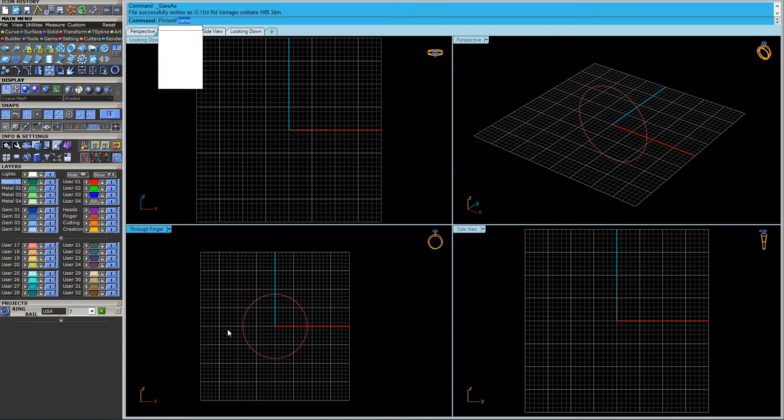Alright, let's start. So we're going to do this in a size 7, and I'm going to place the background image. I already have this in my desktop, and I'm going to align it with my finger rail here to make sure I get it proportionally right. And I'm just going to trim this image. Alright, so we could start.

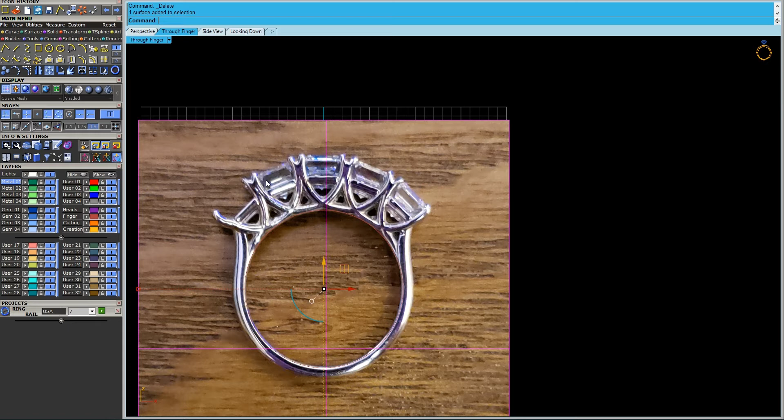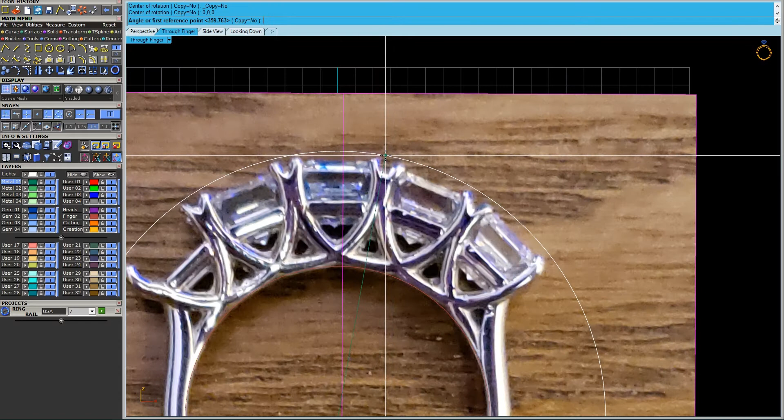What I'm pretty much going to do is remove 1 stone from this setting, and I'm only going to do a 4-stone. So from this same image we can use and just rotate it here. So imagine there's only 4 stones here. Once we do that, I'm going to actually put in the measurements for my stone, and I'm looking for the emerald builder.

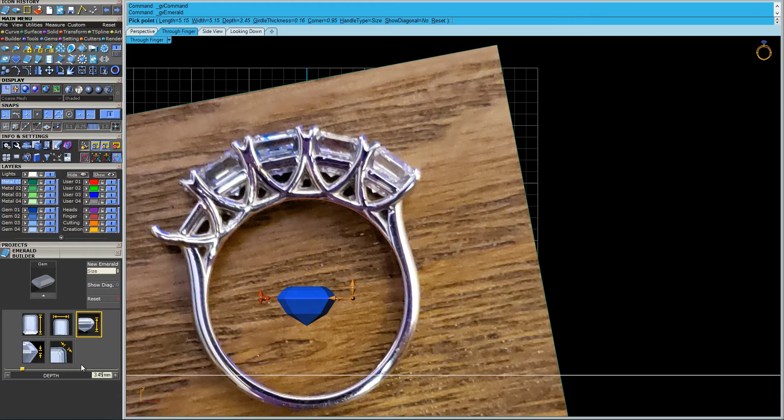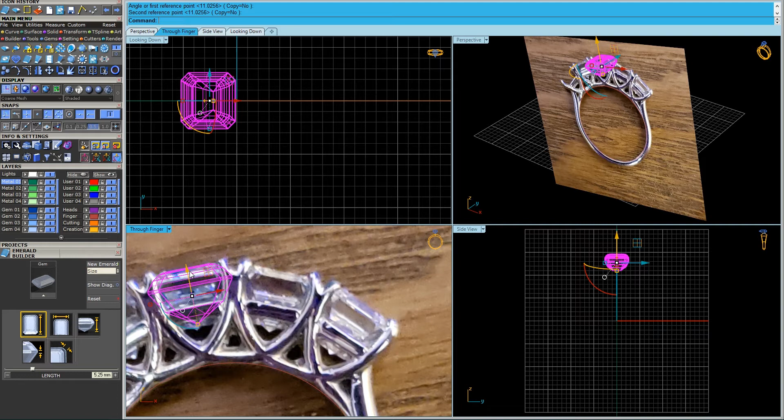Okay, once we have that, make sure everything's okay. And I'm gonna just bring the stone up here, rotate it off the center. Okay, I'm gonna lower it a little bit. Right here, make sure everything's okay, and I'm gonna copy and rotate.

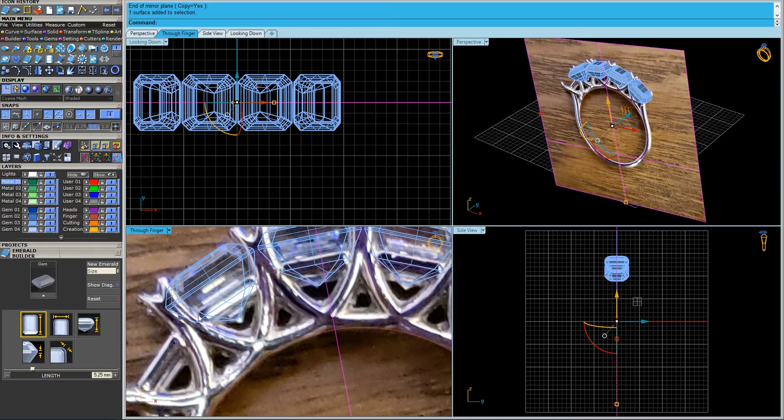I know I did a similar video before. It was a trellis design for, I believe it was a wedding band. It was I think the first video I did. It's similar to it. It's just like a woven pattern, where part of the woven pattern is the prongs that hold the stones. It's pretty common. It's a classic look. People seem to like it.

So, alright, from here we're just gonna do the shank real quick, change the shape. And I know it's not exactly the same distance as in the photo. I don't know why when I scale it, it scales also the measurements on actual size. So I'm actually measuring a sample that I have here in hand, and it's more so these measurements. So 1.65 on the bottom, 1.75 on the sides, and on the top I'm going to leave it at 4 for now, because I'm going to redo this angle here once we get the trellis done.

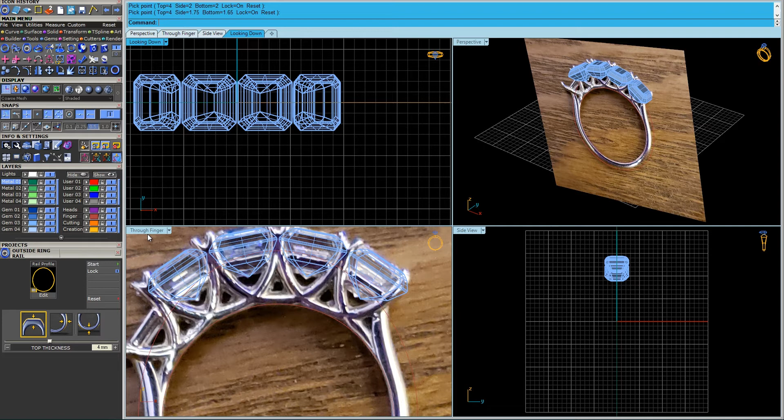So from here, I'm actually measuring the thickness of the trellis, the prongs, on the sample that I have. And they're about 1.2 thick, so just keep note of that. So from here, I'm just kind of tracing a little bit.

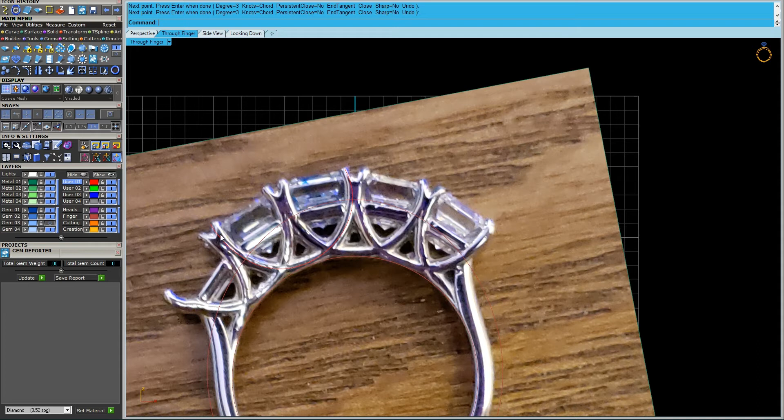Now each stone has its own set of prongs, so it's not the trellis where it's sharing. For these size stones, I don't recommend sharing one, since they're almost a carat a piece, I believe, so they're, you know, pretty expensive. So I recommend that you do an individual setting for each stone for these ones.

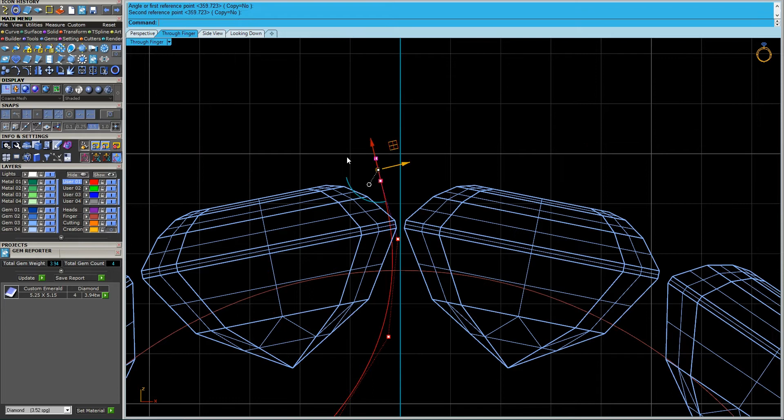So from here, I'm just gonna hide the image real quick and just see where the lines kind of fall into place for the stones here, because the image isn't always to scale like what you're modeling, so you also have to adjust as you see. So from here I'm just rebuilding, doing 10.

As I said before, the thickness for these, in some spots it's thinner towards the corners of the stones, more like 0.95, 1 millimeter. They're 1.1, 1.2 in some spots towards the base. So I'm just going to do an average of 1.2. So offset each by 0.6.

As you can see, I have to bring this part up. So make sure you have your history on, as I don't have mine on. So I'm going to turn that back on. Redo this part. Offset both sides. Turn on my control points.

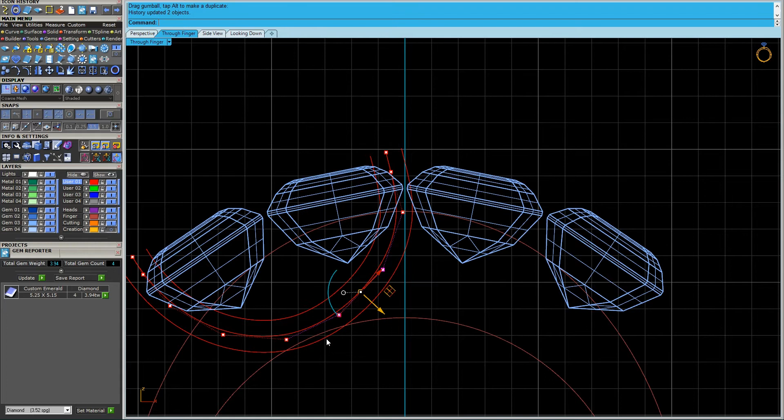And I'm going to start moving these up, because I don't want part of the trellis below the fingernail, not too much. So about there is okay. So from here I'm bringing back up my photo, and I am going to copy rotate.

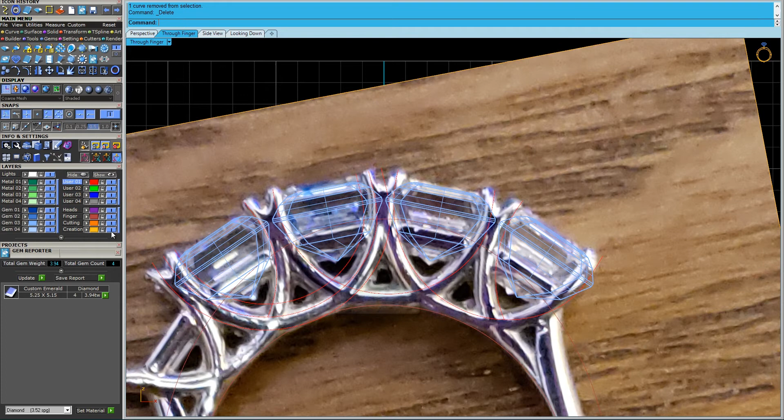From here I'm going to split by point, and I'm going to delete some of these parts. This is supposed to be over, under. I shouldn't have split that part. Sorry. So because from here we have this going on here on the bottom, I'm actually going to trim it here. Let's move this on the side. Okay, there we go.

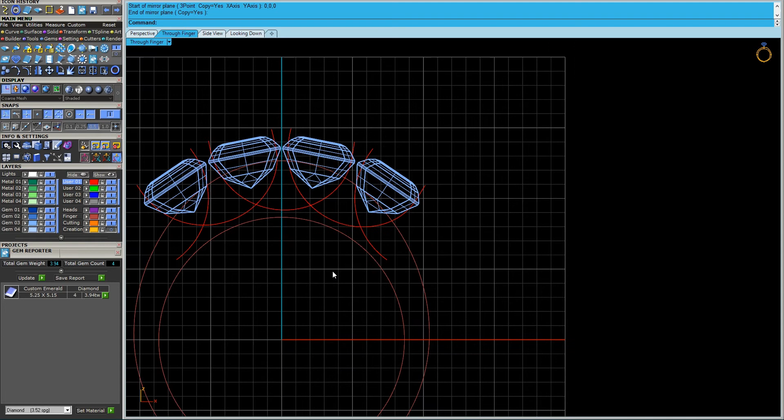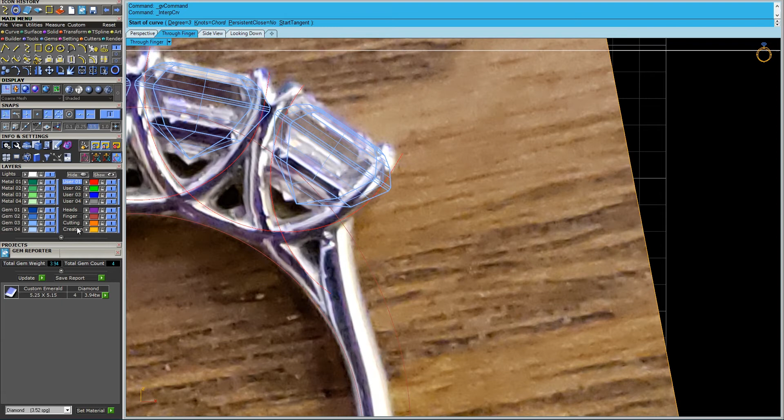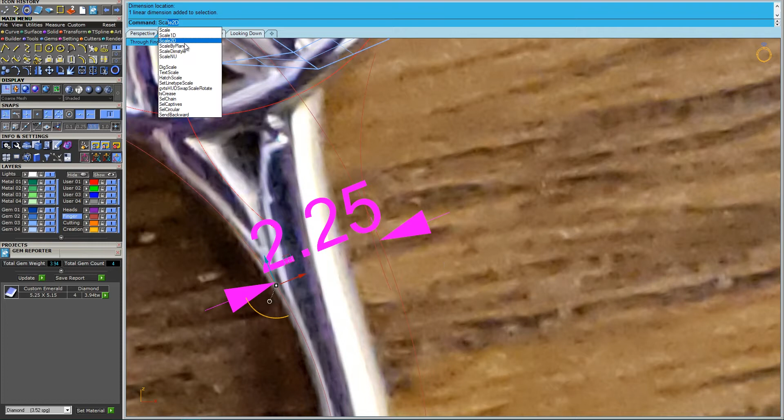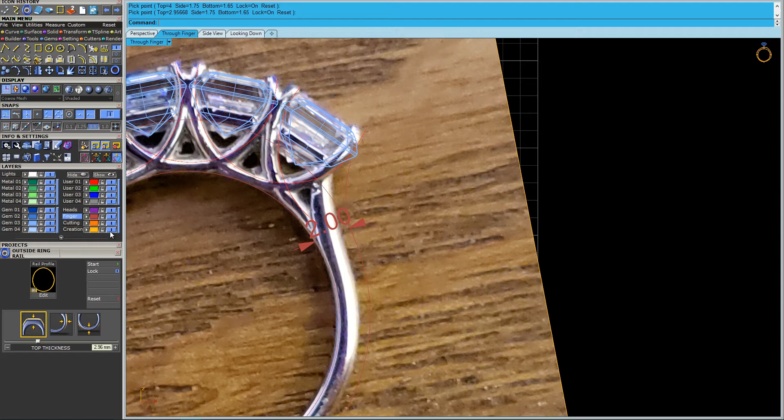From here we could do the shank part, so I'm just going to use my interp curve. I'm just going to eyeball here. And this area might be too thick, 2.25, and the sample is only about 2, so... Scale 1D. I'm just gonna do that, and I'm gonna edit this. Bring this down a bit. That looks about right. Okay. I'm just gonna split with those two that I just made. I'm gonna rebuild the whole thing. That's good. Okay.

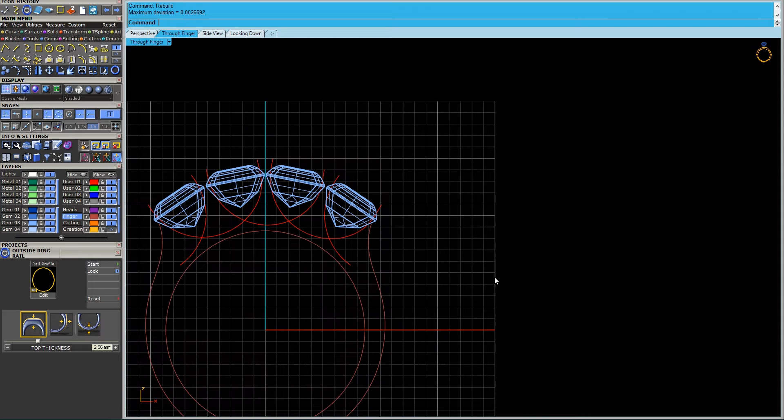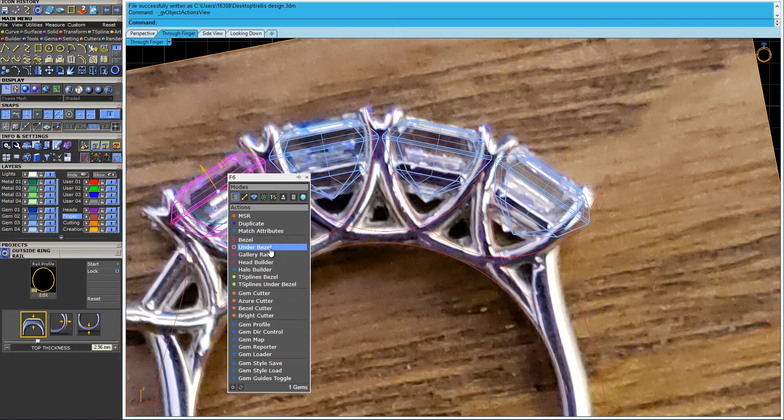So from here, I'm gonna actually build the seats here. So the distance of the baskets itself is about 1.15. So we'll do it about 1, I'll say 1.2. Choose that. I'm gonna change the profile curve shape. Choose this one. 1.2. Lower this bit. Change the scale to 98%. And I'm gonna do it on all 4 stones. So I'll leave this back at 100. I want it to kind of touch there on the sides. Okay.

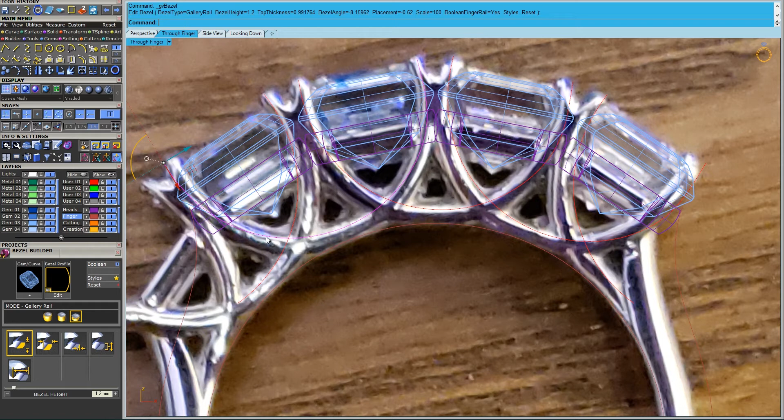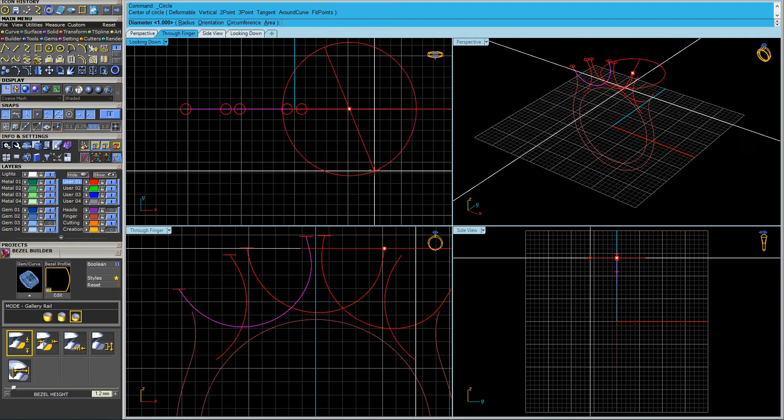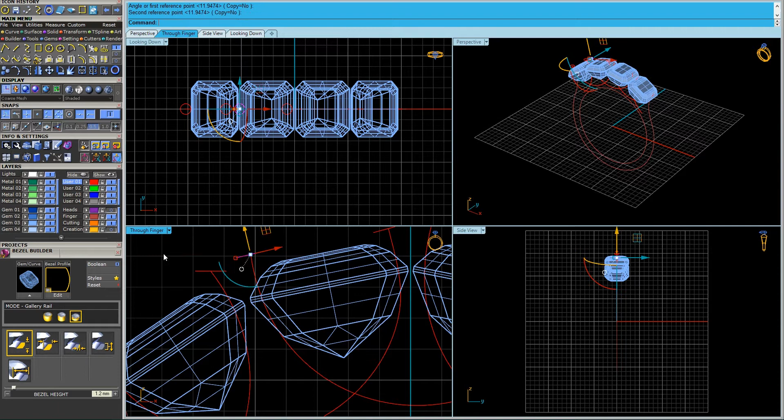So okay, here is where we're gonna try to do the over under on each trellis. So if we start from here, I'm gonna do a curve here, 1 millimeter. Just gonna rotate these and orientate it to the stones. And then here I'm gonna add another one. I'm gonna do 1.2 though.

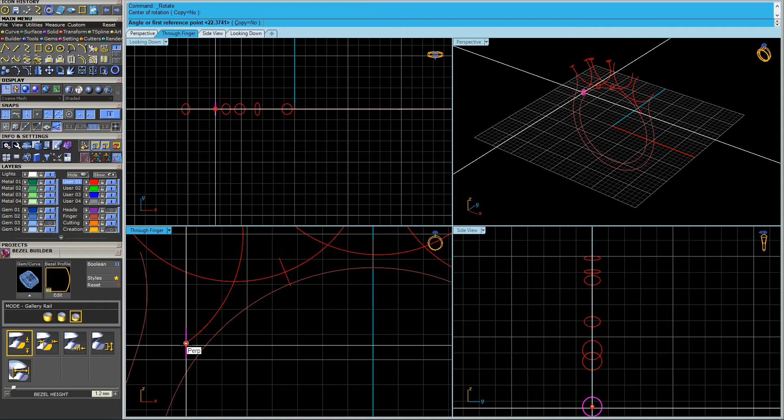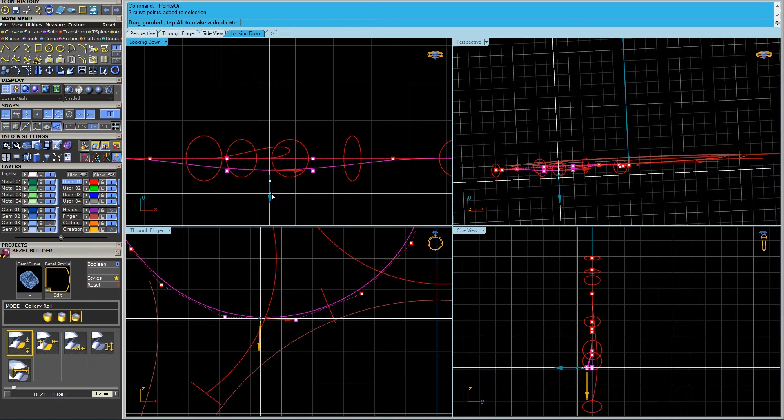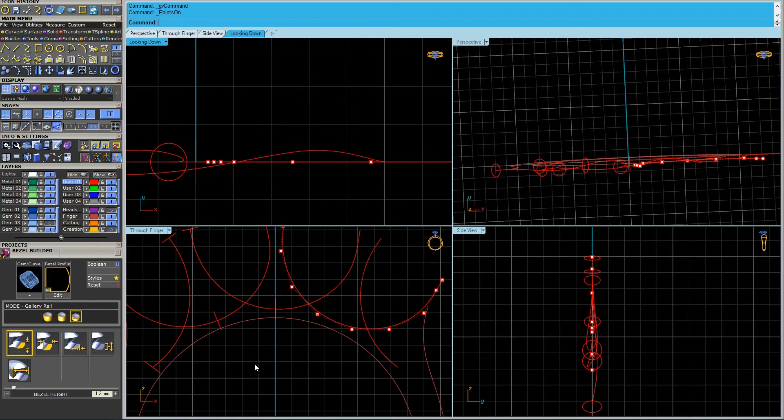So this curve is going to go behind this one. So I'm going to bring these control points on, and I'm going to move them myself here. These I'm going to push out a little bit. Okay, see, because my history is on, it's updating all the other ones, so I gotta turn this part off. This is the part where it gets annoying if you don't turn it off. So let me redo this part. We'll push this back out. This goes in. We gotta make sure that it's okay. All right.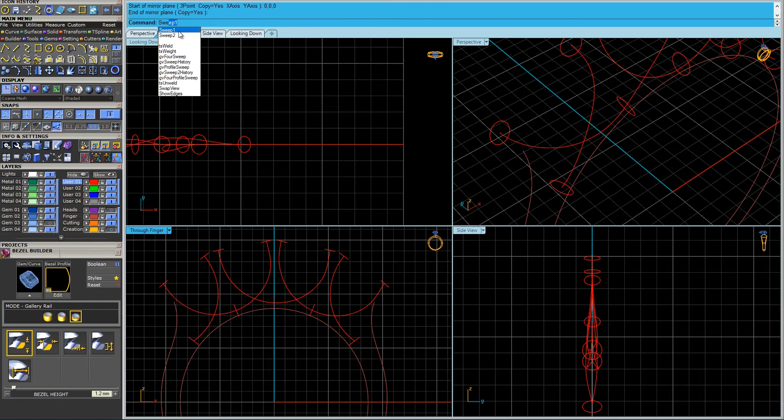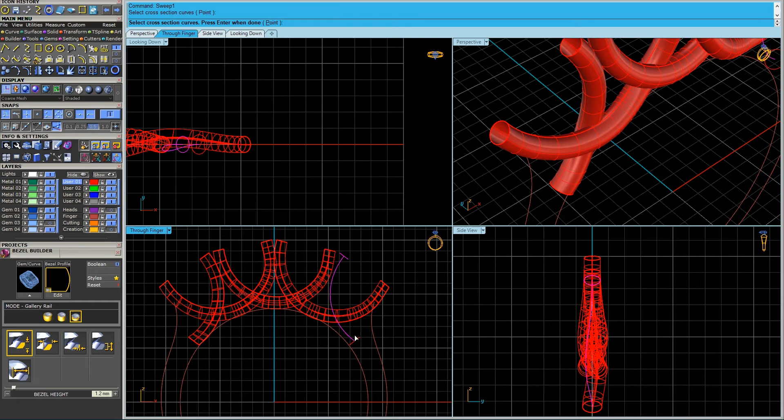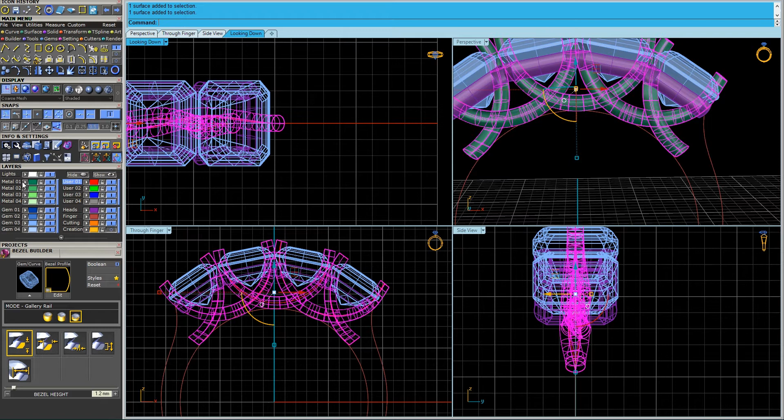I'm just gonna sweep them just to see what they look like before we start moving the prongs into position. Okay. I'm gonna move these. Put it in a different color. Turn my shade on. Move here. So see how I gotta move these more into place. Actually, at this step, you could turn your history back on because it's gonna help you. So again, just do your sweep. Now we're kind of going backwards a little bit here, but you'll see why.

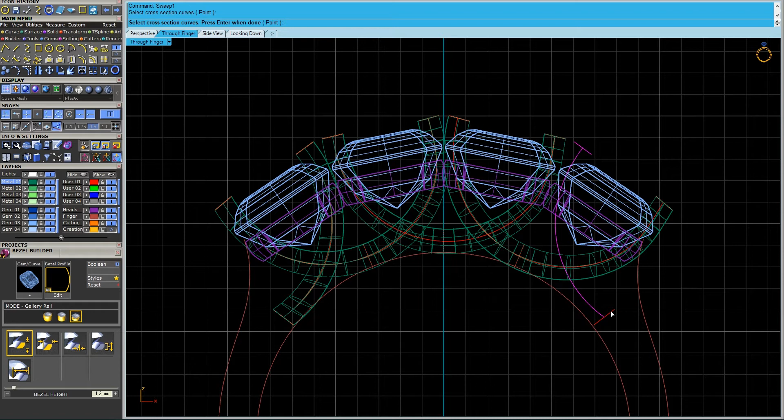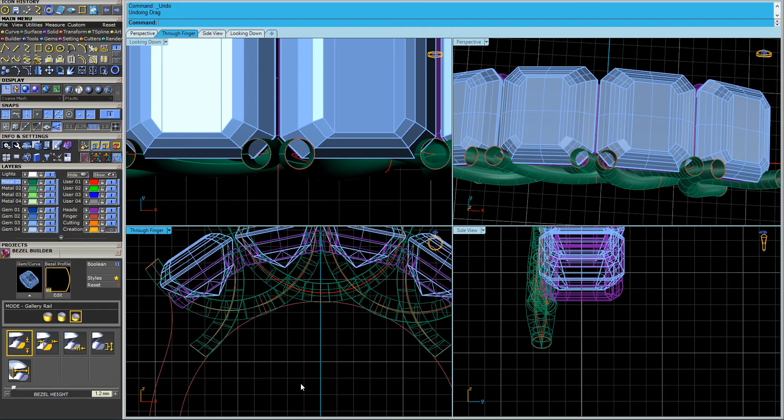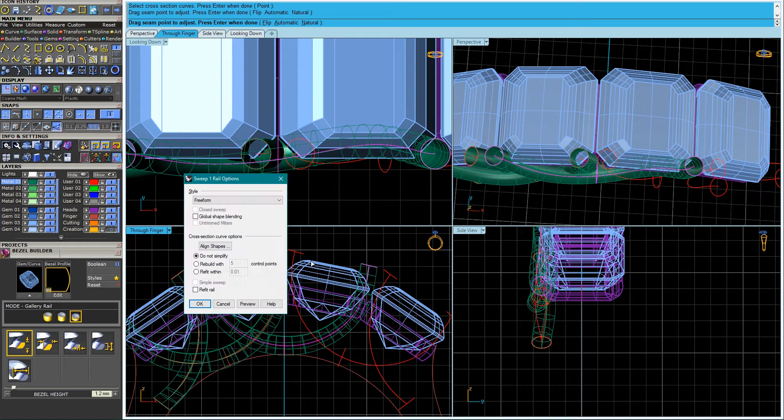Okay, from here, actually grab your curves, the prong setting, and move it to the corners here. Because if you have your history on and your updates, you can actually see it move like in real time. So these are actually out too much. In the sample, they're pushed in. So I'm gonna actually move these. I gotta redo this part again. Bear with me. Okay, I don't know why I didn't do that before. Alright.

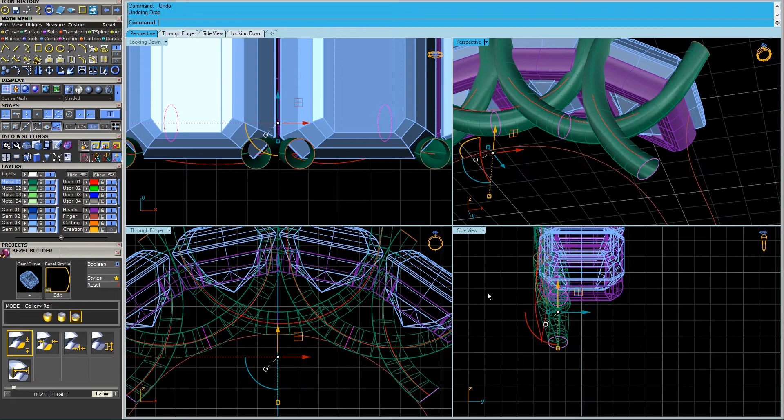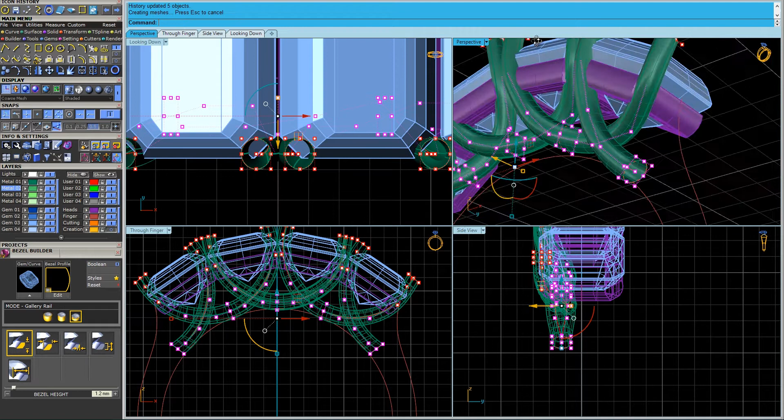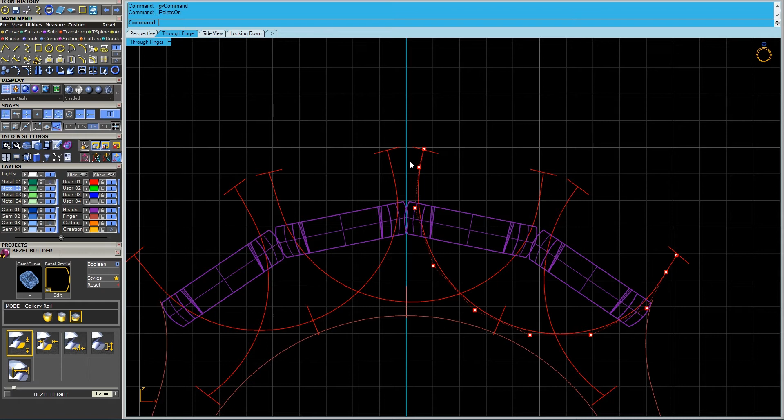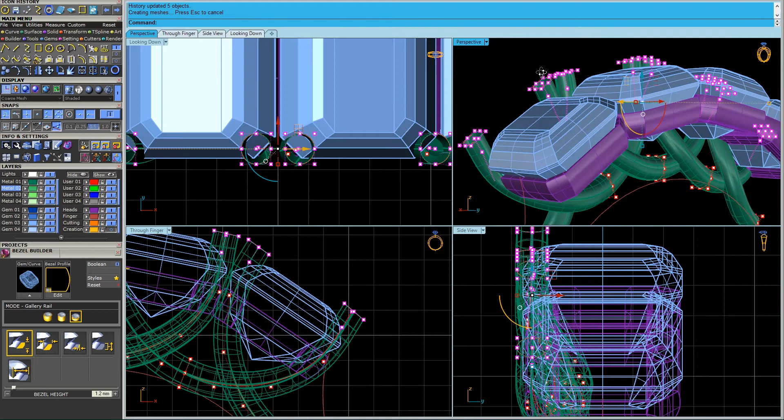So I'm just moving the whole bottom section. I'm actually moving that part in first. And let's see how it looks. Okay. And from here, I'm actually gonna move... So I turned on the control points and I'm gonna move this over a little bit. So up there. I don't know, some of these have to be moved.

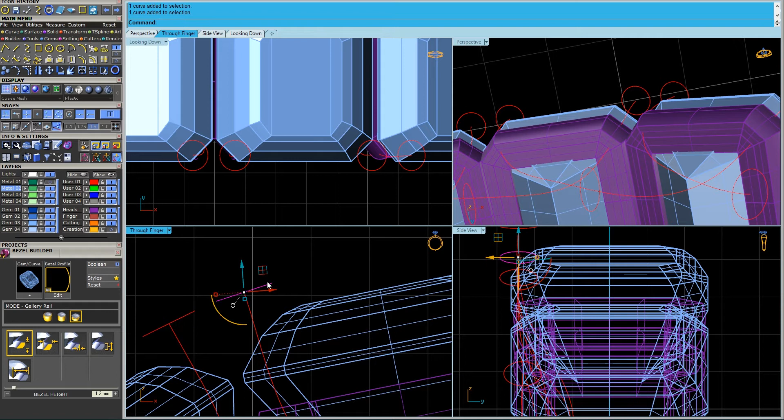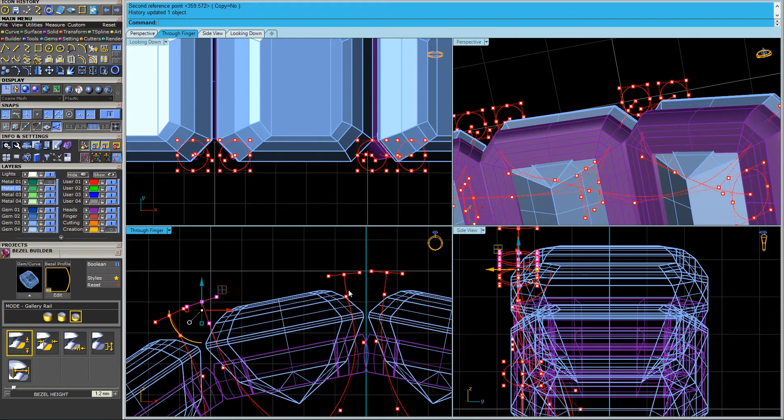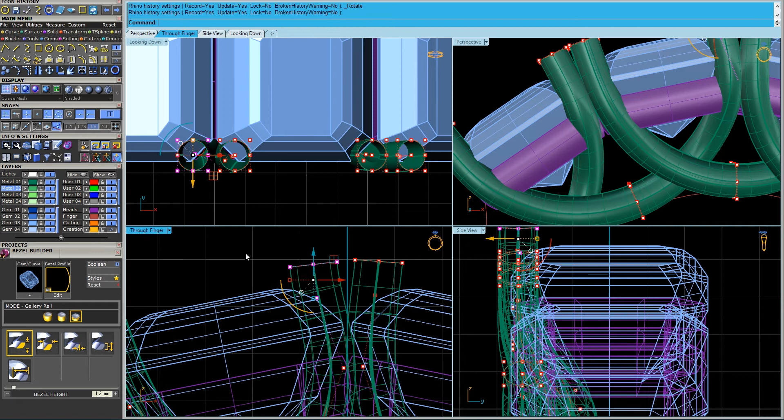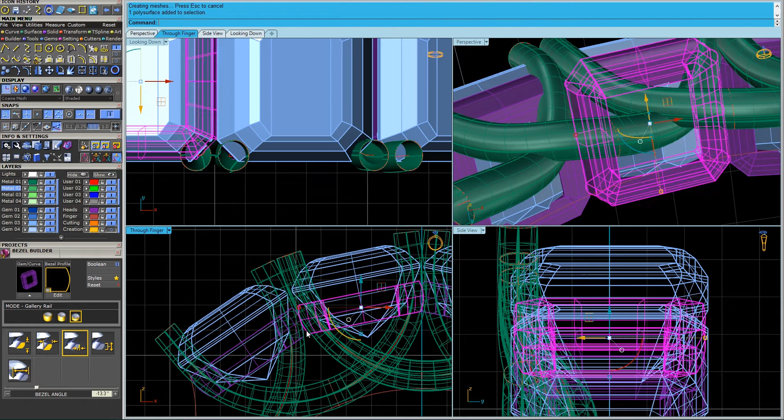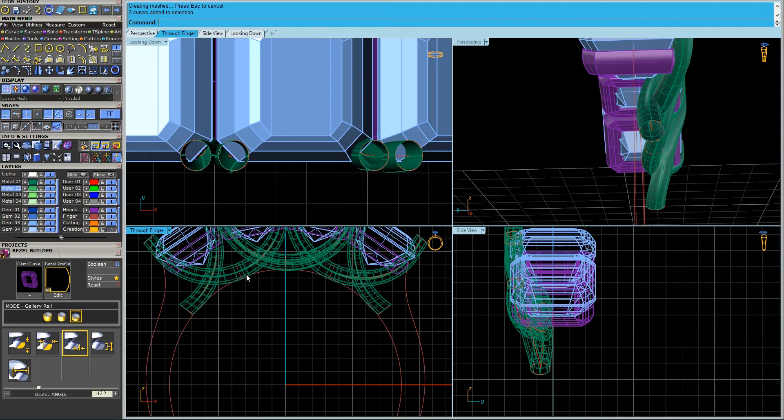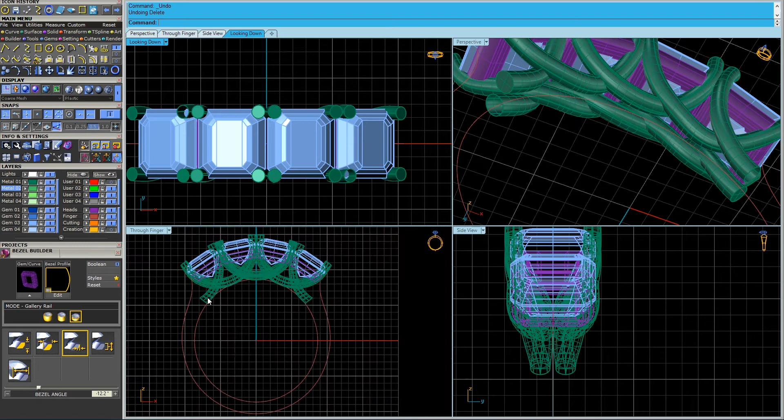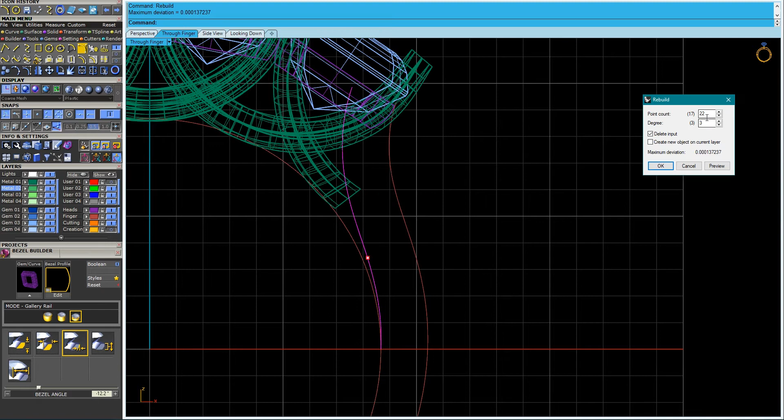Okay, we're gonna fix this once we build the shank here, and we're gonna close in the bridge here. So just for visual purposes, I'm capping them, and I'm copy rotating it to the other side. I don't know why this didn't cap here. From here, we're going to offset through point. I'm splitting it here. Make another curve. Rebuilding this to maybe 22. And I'm going to change this. Move around like that.

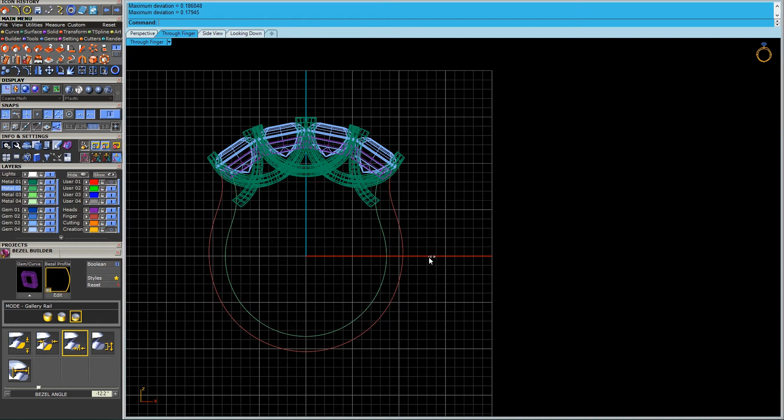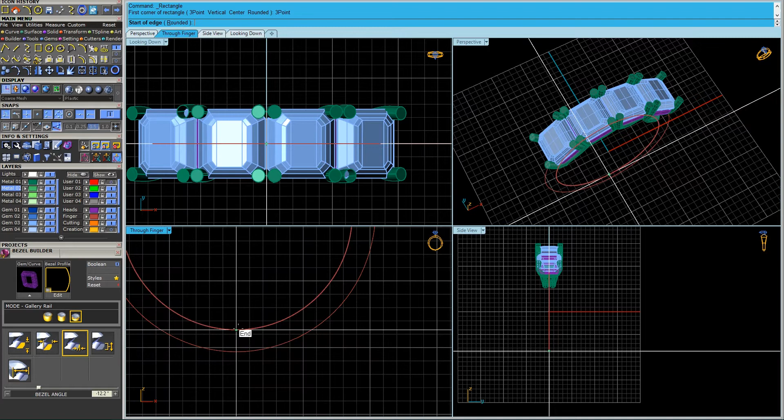Okay, that looks good. Alright, so I'm mirroring it to this side. Rebuilding this to, I don't know, let's say 22. Okay. On the sample, I'm measuring a width of 2.3. So I'm gonna make my own profile curve here. I do it a little bit thicker than the actual width of the sample. So

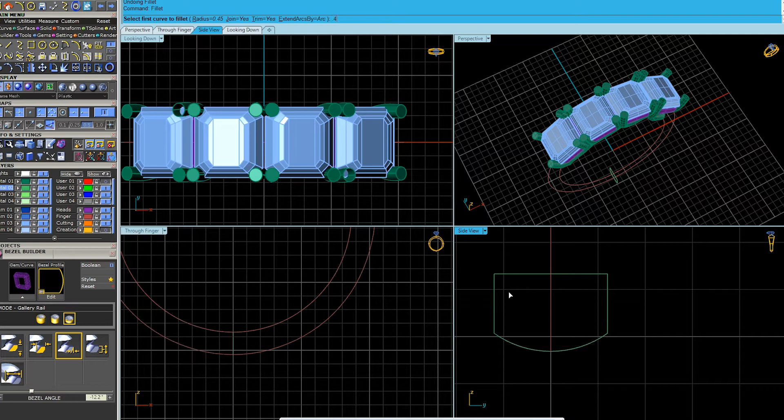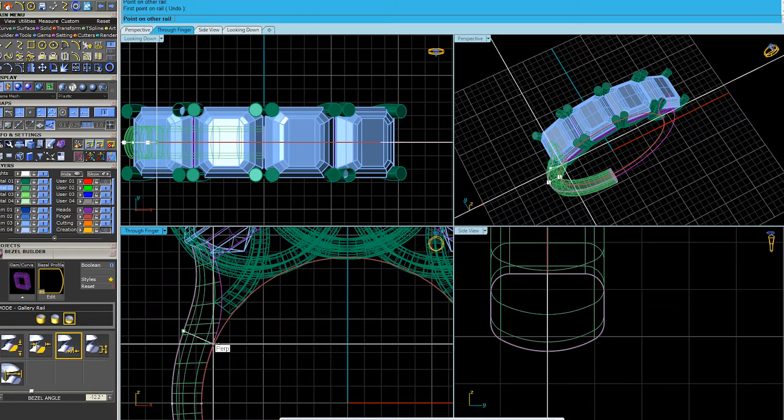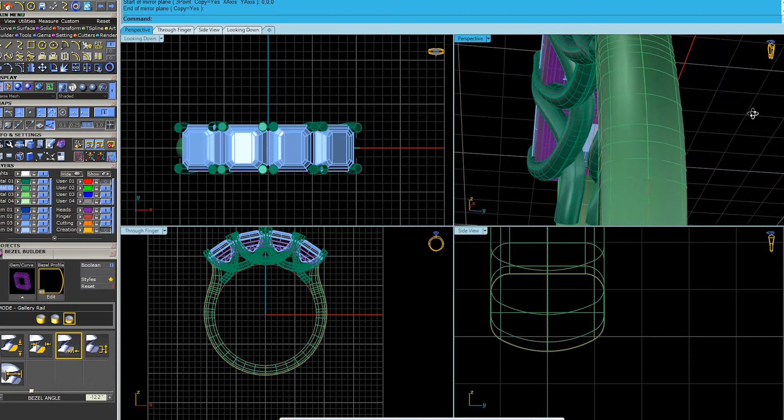Alright, so here we're just gonna do a sweep 2 and maintain height, add a slash. I always do one in the mid and one about there. Okay, and we're gonna cap this, mirror it, see how that looks, trim that off a little bit later. Alright, this is where we need to fix it a little bit. So on one side it looks like it sticks out further, so we're gonna fix all this. So I'm just gonna redo my prong setting because that one was a little funky, it didn't cap.

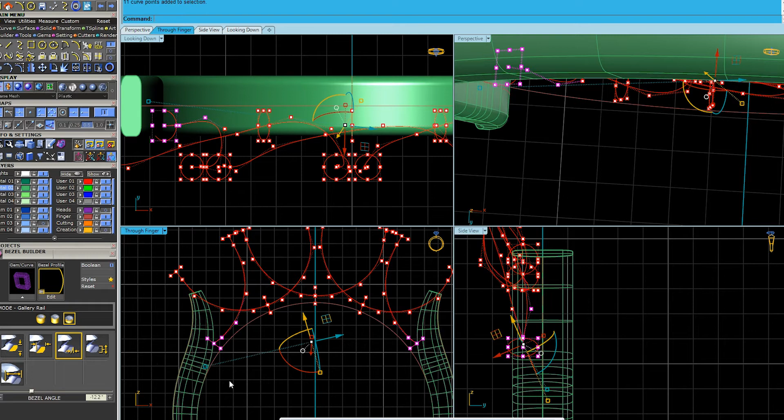Alright, so from here I actually have to move all these, so I'm gonna also move all the points from below the stone's culet. So anything from here down. Say something like that. And I'm gonna, excuse me, I'm going to rebuild these two. So I'm gonna do 8. I'm gonna try this again. Sweep 1.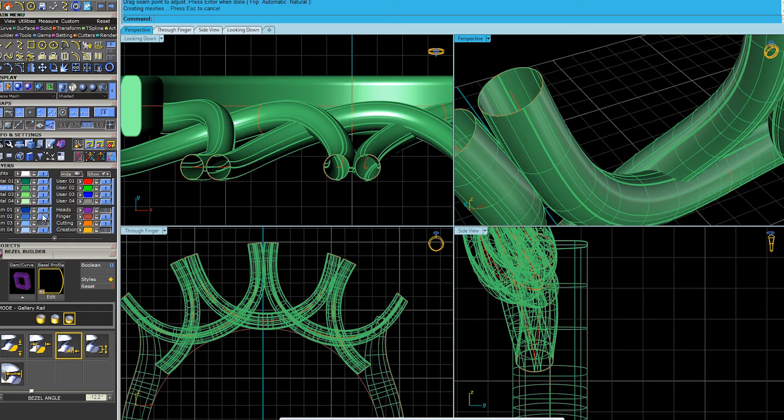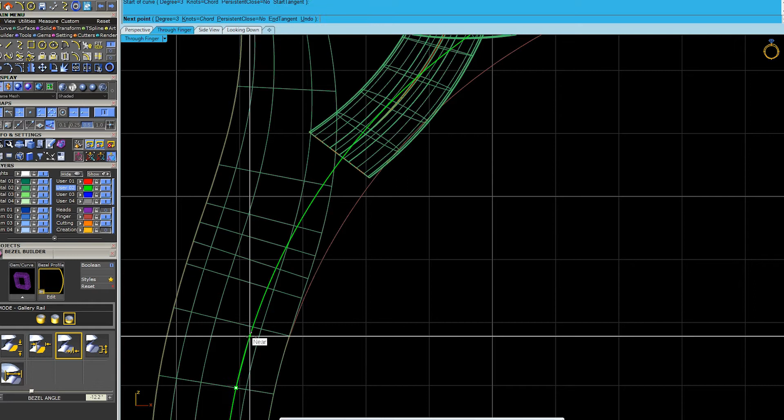Okay, so from here, I'm gonna offset 0.6 because what I'm gonna do is I'm gonna trace this. So I'm gonna do that. I'm gonna hide this.

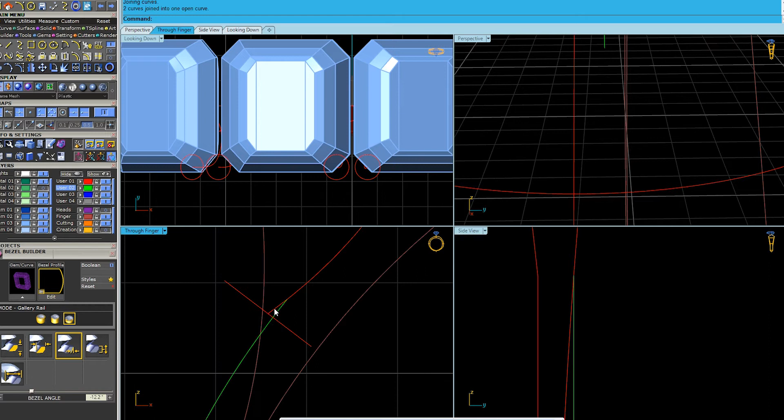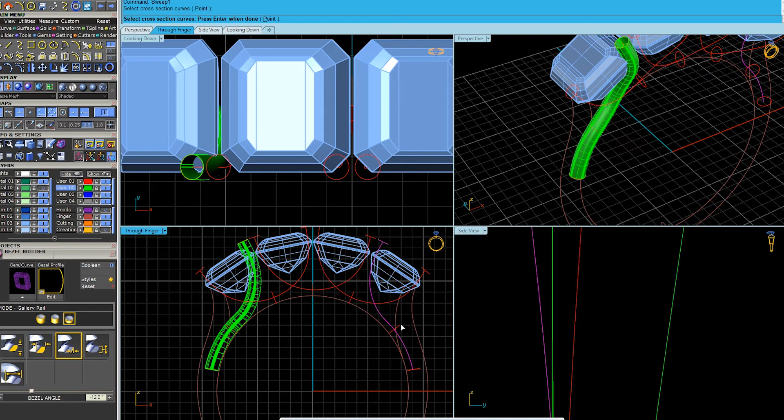Rebuild this, I don't know, 12. Same here. And I'm actually going to sweep 1 from here down. If it lets you. There. And I'm going to dupe edge. I'm actually going to take that profile curve, mirror it. Sweep 1. Same on the other side. Sweep this one, that one. See if these cap. Okay, that works. And that's how that works.

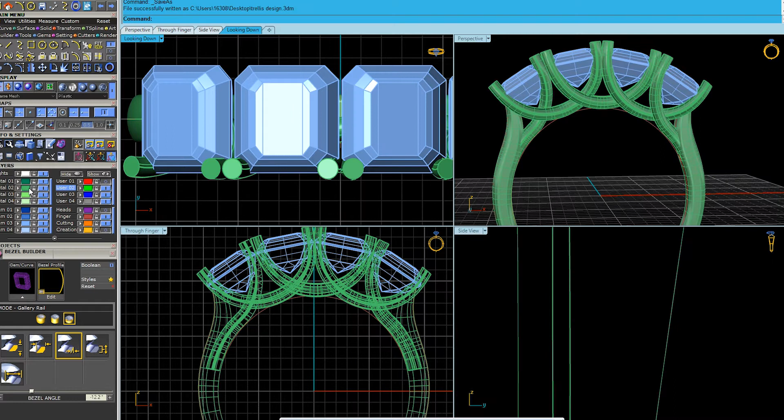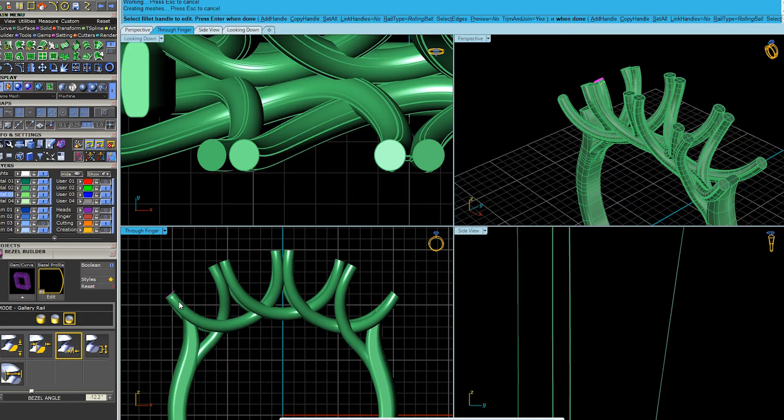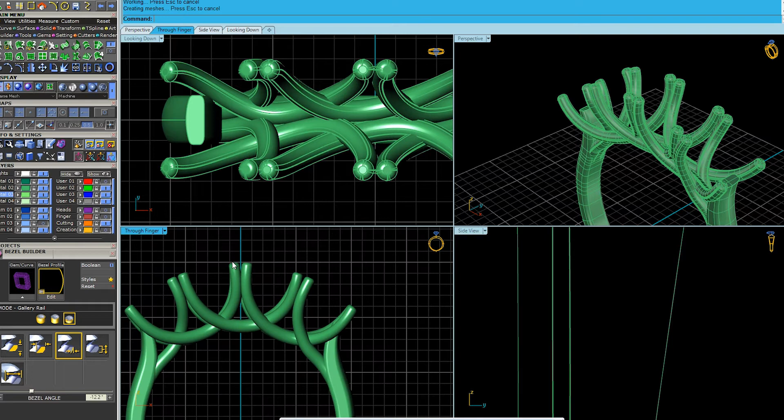I'm gonna copy rotate to the other side, bring up the little baskets. And here you can round out the tops of the prongs. We'll see how that looks. So we're just gonna do fillet edge. And we're just gonna do 0.4 for now and see how that looks. And you see sometimes it doesn't always work. 0.3. Okay, that seems to work better. And there you go. So that's pretty much how you do a trellis design, from a photo that I took, that was actually from a 5-stone setting.